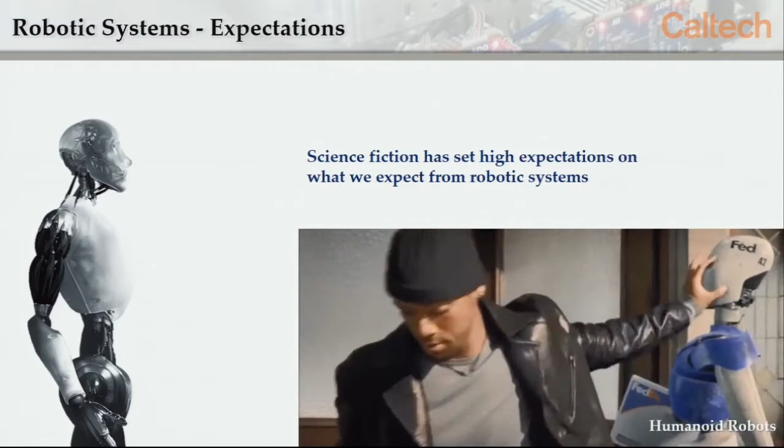As many of you probably did, I grew up on science fiction, still read it to this day, I hope you never lose that marvel. Science fiction has obviously promised us a lot with robotic systems and what they could do, from humanoid robots that deliver mail, walk the dogs, and even at the end of this, hug kids, so there's the human-robot interaction part, all the way to autonomous cars, robots that explore space.

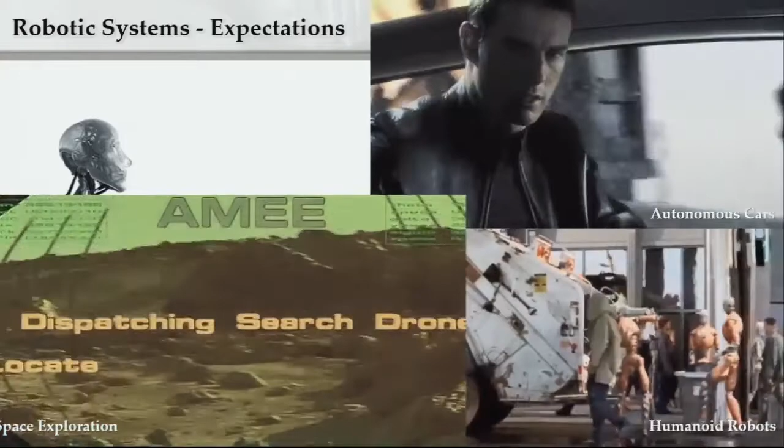This is off some pretty hokey 2000 movie with Val Kilmer, where this robot actually tries to kill people. But what's interesting is this robot has a helicopter that takes off and explores. And if you know, the Mars 2020 mission will have a helicopter on the rover that will take off and explore. So sometimes fact mirrors fiction in interesting ways. And of course, robotic-assisted devices and exoskeletons, right? So all these have kind of driven our imagination of what robots are and should be.

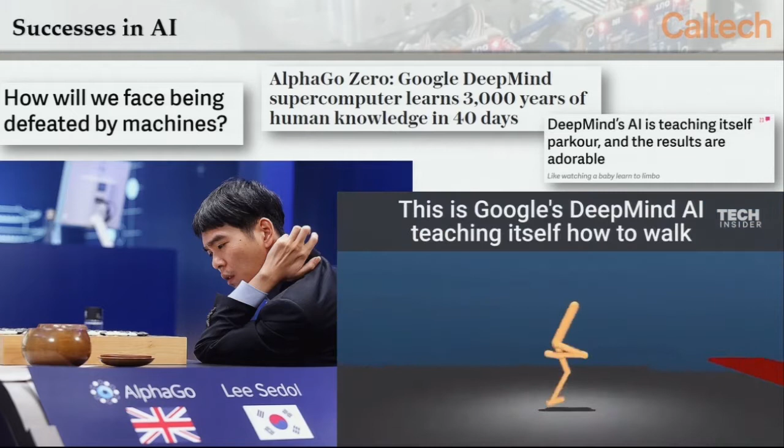And in that context, where are we today with this kind of image of where robots should be? The answer to this is a little funny. I had lunch with a bunch of grad students, and they convinced me to change the first slides in my talk last minute, so in between meetings with students, I put these in. The idea is, here's where we are from an AI perspective.

And I think Berkeley's a fitting place to do this.

There's been incredible successes recently, and you see the headlines, right? Like, supercomputer learns 3,000 years of knowledge in 40 minutes, or 40 days, and AlphaGo beats the Go champion, really impressive. And of course, this video a little while back went super viral because it learned how to walk all on its own, right? End-to-end learning. So this is sort of what everyone is talking about right now.

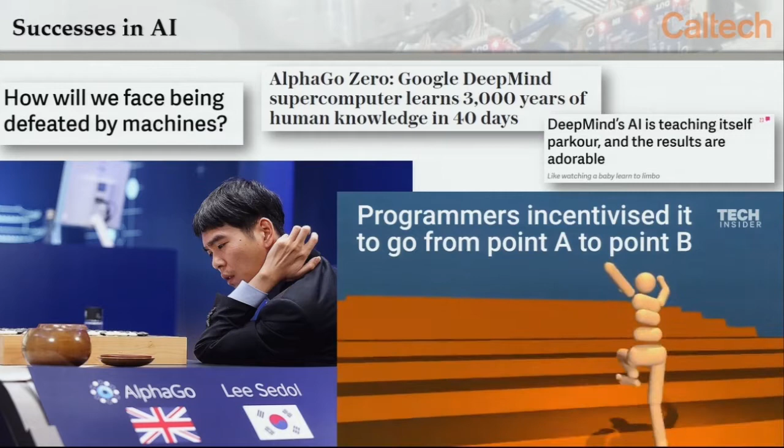And in fact, this spurs a lot of public perception, right? Like, how many doomsday articles do you read? Every time I post a YouTube video, you know, Skynet is here. And it's really funny to see that the public really doesn't know what's going on right now.

And in fact, if you read these headlines, things like this, they warn about artificial intelligence. And the subheadline is that Google-owned Boston Dynamics releases this video that does something, right? So there's AI and Boston Dynamics, right? And I think some people know where this is going.

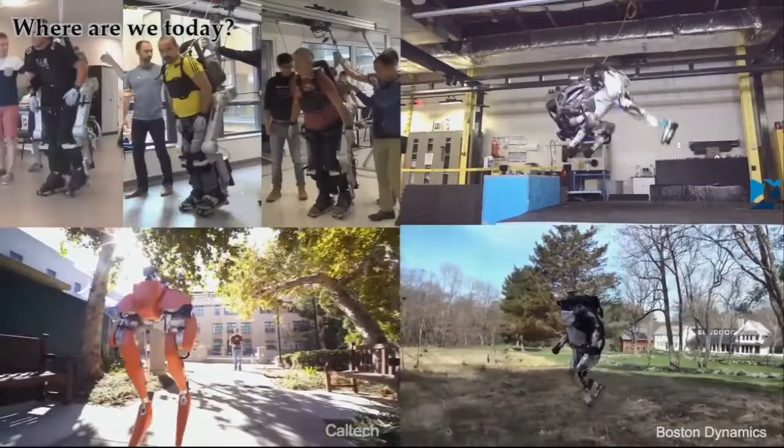So AI has proved very successful in the purely digital world. But let's look at the successes on robotic systems. We have Boston Dynamics that everyone knows doing backflips and running, and this is really impressive from a robotics and control point of view. To be a little bit self-serving, I have robots walking around Caltech, and I have exoskeletons walking paraplegics around. So we've done a lot on the robotic systems side.

So the question always comes, how much of this uses AI? By most definitions, the answer is zero. But it depends on your definition, and we could quibble about this.

But in the standard notion of a deep neural network or some sort of machine learning of this popular form, these all use robotics and control as their core thing. Now, I'm not advocating that's the only solution, but I think it's important to recognize this. And why is this the case?

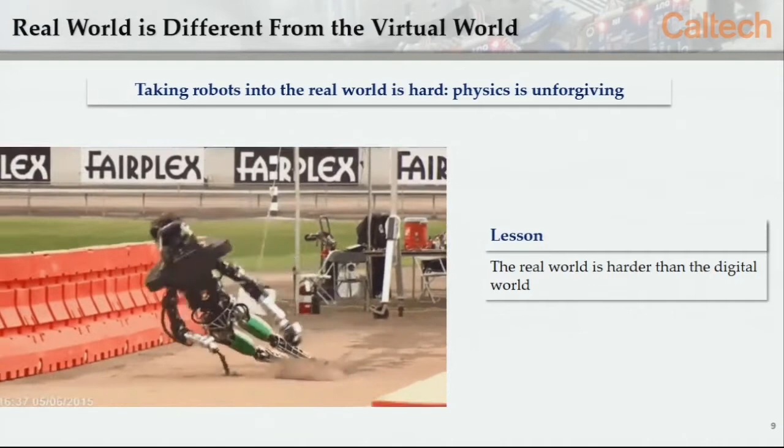Because the reality is that nature is brutal. Mother Nature doesn't care if you don't know what you're doing. She'll smack you down and make your robots fall. This happens to Boston Dynamics all the time. You've seen all the fall videos. I like this one especially, because it's just like a compendium of failures. And then it goes again.

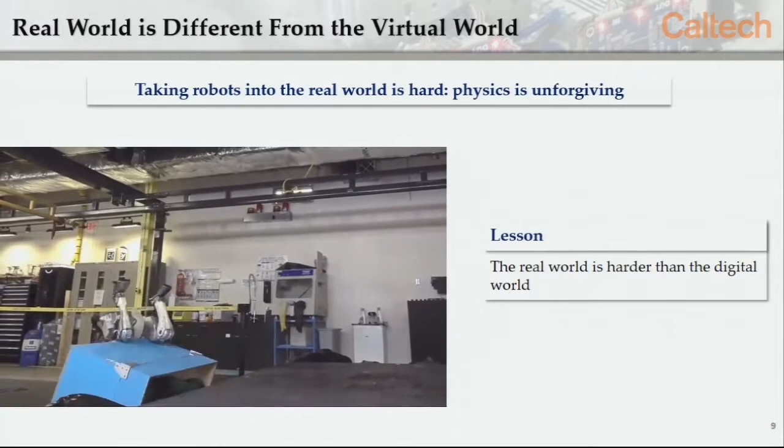Of course, it happens with the backflip too. And I give Boston Dynamics a lot of credit for showing their outtakes, because what you probably all know is for every beautiful video that you see, even in this talk, there were 10,000 videos that failed before and 10,000 that failed after. And you get to see the one perfect moment in time when everything works out.

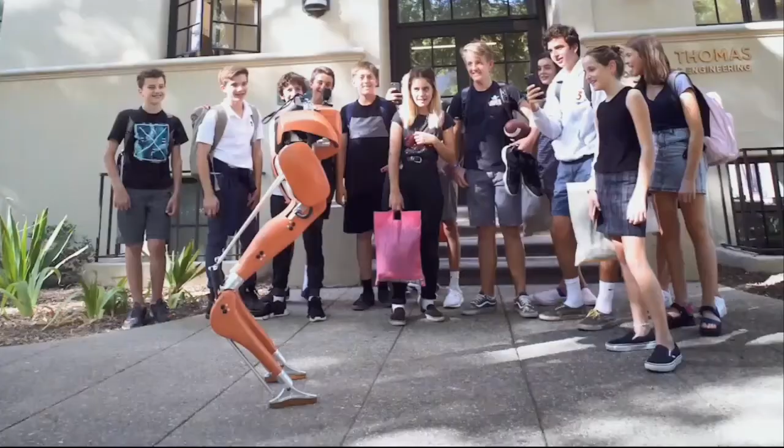And just to show that I'm not picking on everyone else besides me, this was Cassie walking in front of Caltech, and we saw these students, and we were doing a shoot, so this is a great shot. They pull out their phones. I feel totally comfortable, I'm back off scene here a little bit. And then I saw this oscillation, and then just faceplant.

And at that point, my only reaction as a seasoned roboticist was to kind of go like this, because that was going to help somehow, right? So we're all subject to nature smacking us down when we think we're doing what we need to do.

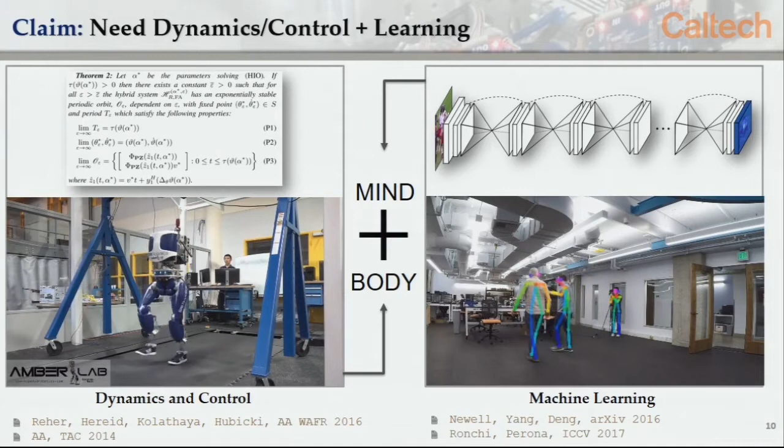So where does this lead to? And this is the message I want to make: here we live in our dynamics and control world, where I love living. We have theorems, we use models, we have proofs, everything's beautiful. Until sometimes you go to hardware and then it's really brutal and you realize you don't know anything.

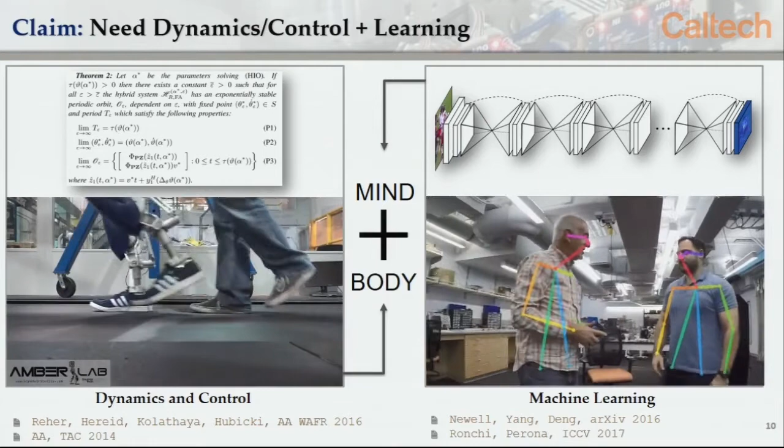On the other hand, you have what I call the mind, which is learning in a general context. What I would actually call this is data-driven methods—things that use data in the absence of models. And my argument is these need to come together. So what I'm saying is we need a peaceful get-together: when we know the models, let's use them; when we don't know models or we only have data, let's exploit that in the context of these models. That's my sort of pitch in terms of AI and robotics to kind of address the elephant in the room.

For most of this talk, I'm going to live squarely here. I'm not a learning person. So I want to talk a little bit about what this means, and then I'm going to connect it to the bigger picture at the end.

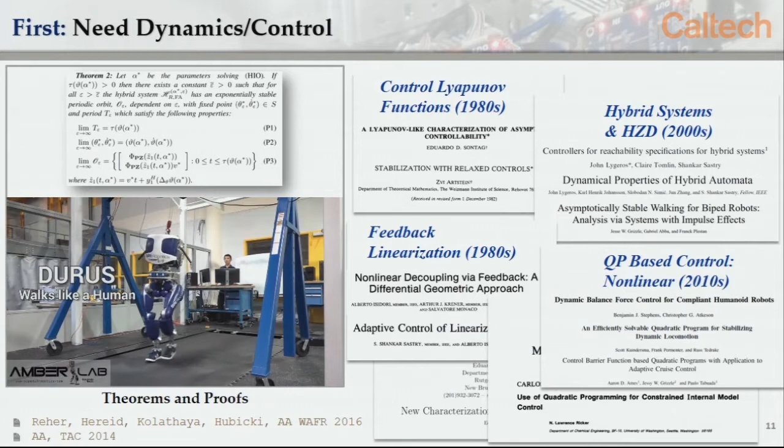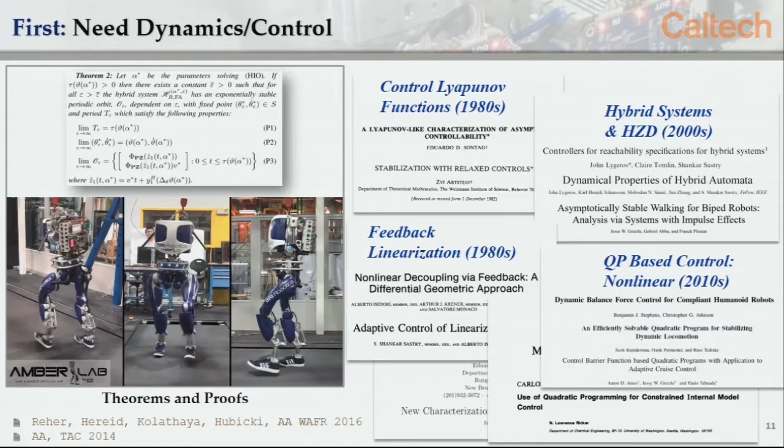So again, we have these beautiful theorems that build on all of this previous work that's happened in control over the years, and also robotics over the years, going back to the 80s, feedback linearization, control Lyapunov functions. Of course, one problem that control theorists have—I'll make fun of them a little bit, this is being recorded so I need to be careful—is they develop this wonderful math and theory with no notion of whether it will work on hardware. It's all about the beauty and understanding you gain, which is very useful. But if it doesn't work on hardware, how accurate is your theorem really? So the question is, how do we pull these things together in dynamics and control?

So I'm going to begin with giving everyone approximately a 15-minute tutorial on nonlinear control. Who's had a nonlinear control class? Okay, a good third of the audience. So you guys will find this very basic. For you people that have not, this might be a little enlightening.

So the challenge was the following: to develop a robot that's an order of magnitude more efficient in walking than Boston Dynamics. Yes, you guys will see this if you haven't yet. And so the challenge was to get more efficient walking than Boston Dynamics. The only way to do this was to exploit all of its inherent dynamics all the way down the chain. So how does this work?

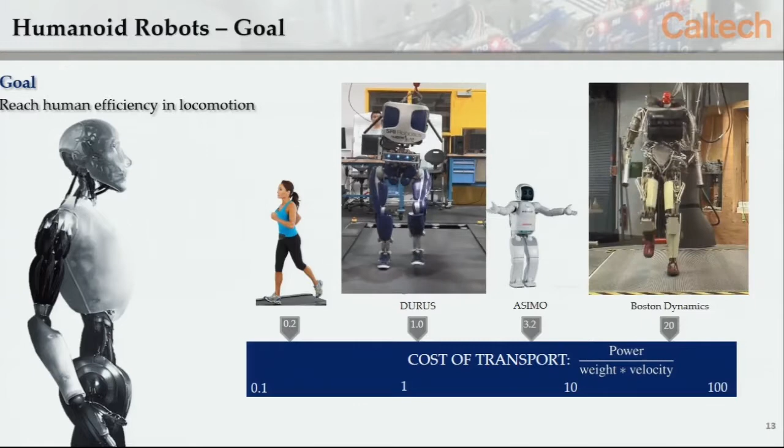So what is nonlinear control of walking robots in a nutshell? The ideas are actually really simple, so I can give them to you in a not too complicated way. What you do is you start with a desired behavior on your system. You have an actual behavior, meaning these functions calculated on your robot. You try to drive them to be the same. When you drive them to be the same, the end result is a simple reduced order model that captures the essential behavior of your system.

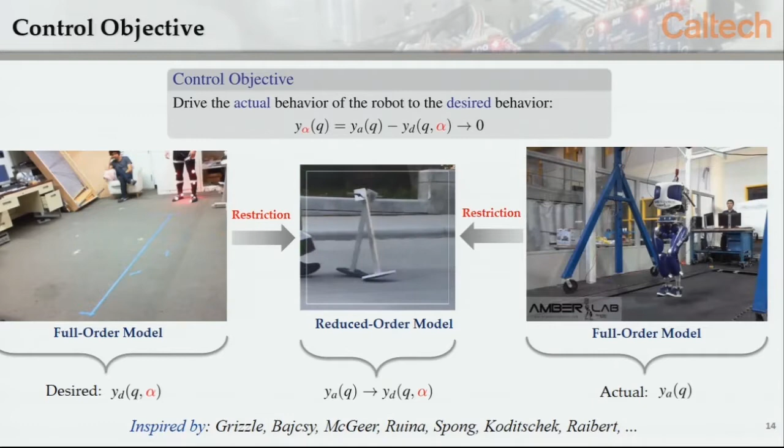By the way, a shout out to Ruzena—these were the first experiments I ever performed right here, 2011 at Berkeley, with Ram sitting back there looking very bored. So we're all, exactly.

So what does this mean? Well, more mathematically, we want to drive the signal to zero, and by doing so we project onto this surface—this is what's called the zero dynamics if you've had nonlinear control. So the question then becomes, if this is our objective, drive some output to zero, that's sort of the canonical objective in nonlinear control, how do we do that?

Well, the first step you'll often take is to say, look, if I take this output and differentiate it twice in this case, you're going to get a bunch of nonlinear dynamic stuff, Lie derivatives, and your input will appear here. And if you're lucky, what's going to happen? This matrix will be invertible. And you can say, I'm going to invert this matrix, cancel out these dynamics with my input, and the end result will be a double integrator.

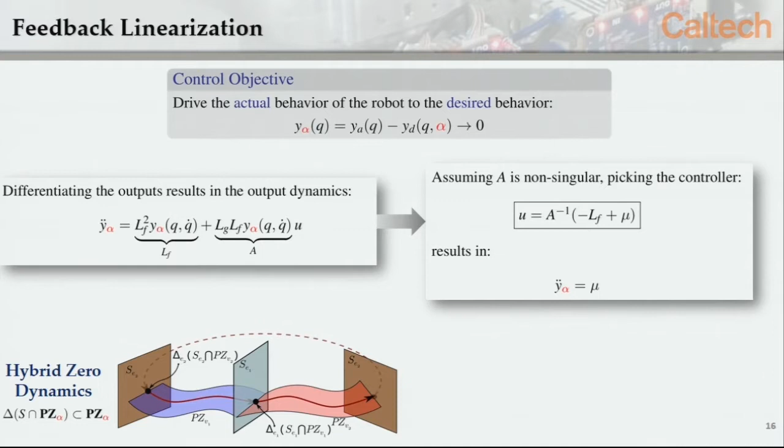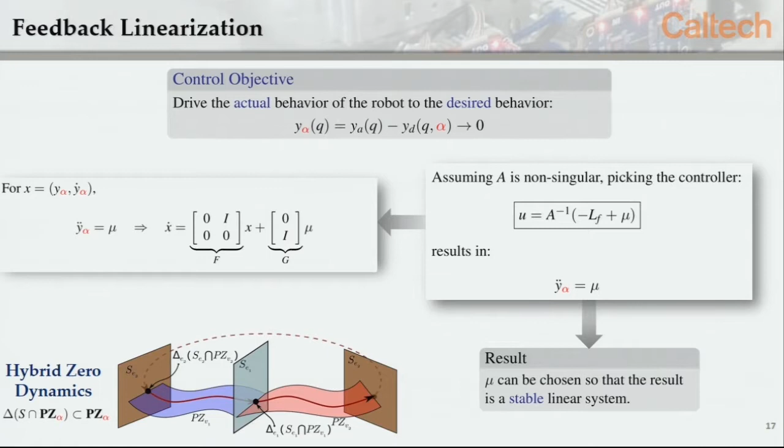Once you have a double integrator, we know how to stabilize this system. It's pretty simple—you can define a whole wealth of feedback control laws that stabilize that linear system. So this is kind of the graphic of the stability down to this surface. In fact, one way to do it is to write that system as a linear control system, so you have a nice F matrix, a G matrix. They're controllable. You can do LQR control. You can do anything you want to do.

And once you pick this mu, that gives you a feedback on these X dynamics. Those X dynamics include your output and their derivative. So by driving these X dynamics to zero, you're driving Y to zero and its derivative. And what you're left over with is what's called the zero dynamics—that's the passive dynamics of the system that you can't directly control. So we've defined this paradigm.

Alberto, hi. And from this paradigm, we can actually prove properties of the system. We have a theorem that says as long as this is stable, since we can stabilize this, the combination of the two will be stable. That's not particularly surprising, right? Everyone with me? Okay.

That is really the first term of nonlinear control in a very concise box. What do you mean by that, the zero dynamics? I mean that these are your outputs, chosen so they're associated with actuators in your system, which means this part of the system is controllable. You use that actuation to stabilize it. What's left over are the coordinates that are normal to your actuated degrees of freedom, which is why it's called normal form. These are the passive parts, meaning the part you can't directly control with an actuator on your system. That's what I mean by passive, okay?

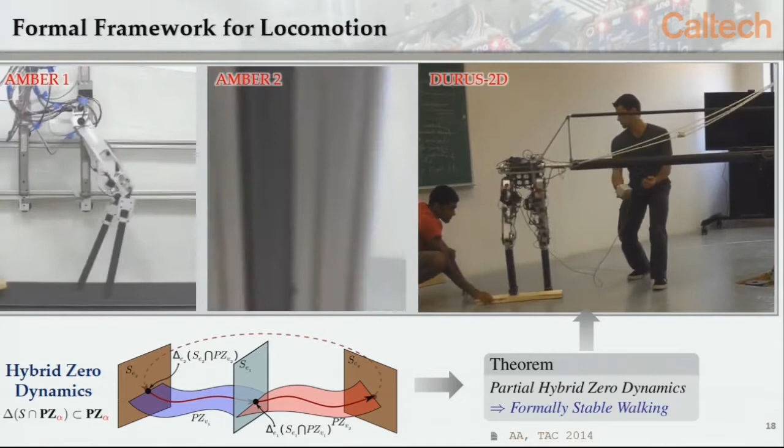All right, so that's how we get to stability. And in fact, this theorem and its offshoots have been implemented on a whole bunch of robots. So this is actually the first robot I ever built. I keep it here for sentimental reasons. Amber 1, Amber 2 — this is a prototype to a humanoid robot as well.

So I wanted to give this primer because what is it that we did here? This is nonlinear control in a nutshell in some context. We started with a nonlinear system, we feedback linearized it, and then we stabilized the system. Great story, right?

What's wrong with this picture? I wanted to give everyone that quick overview because there's something inherently wrong with what I just did. Something even kind of offensive about it. What is it? Let's forgive that, let's assume you have a perfect model. Yeah, if you have modeling errors, it's a nightmare. Something deeper than that, though.

You can't — that's correct, but I'm looking for something a little bit deeper. Sometimes even in principle, you can't cancel out the nonlinearity. You might not be able to invert that. That's still not what I'm quite looking for. The control can be unbounded. These are all true statements, but none of them I'm looking for.

We're taking a system that's nonlinear and beautiful, that has its own inherent dynamics, and our answer to that system is to cancel out everything that's nonlinear about it. Make it look like a linear system because that's what we understand. So we're fundamentally destroying the inherent properties of the system, right? See what I'm saying? We're making it look like something we know, even though that thing we know might not be the best thing.

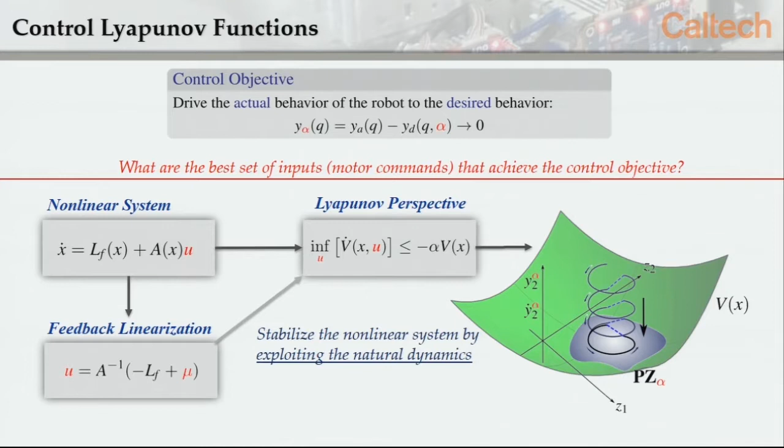Everyone believe me? Okay, so let's go through the math really quick. Just to recap, we have our system in normal form. This part is controllable, and this part is passive — so we have our x dynamics and our z dynamics.

A Lyapunov function is a positive definite function, so think about it for our intents and purposes as a bowl. Lyapunov theory is very simple: we have a bowl, and our objective, y equals 0, is at the bottom of our bowl. As long as our derivative decreases properly, subject to this bound, that guarantees our Lyapunov function will decrease exponentially. But it's a positive definite function, so if this decreases exponentially, so does our state, which is our error dynamics. So that means we'll have exponential decay of our error dynamics, all through a single inequality, a one-dimensional inequality.

Right? So the way I think about this is these fair games, where you put the coin in the thing and it spins down. Who's played these? I took this video myself at the Minnesota State Fair, and I was super excited. I took a picture of this with my wife because I was super excited — I'm like, this is Lyapunov functions incarnate, this is beautiful, and everyone thought I was super weird.

I was the only person, like, over 12, putting coins down this thing.

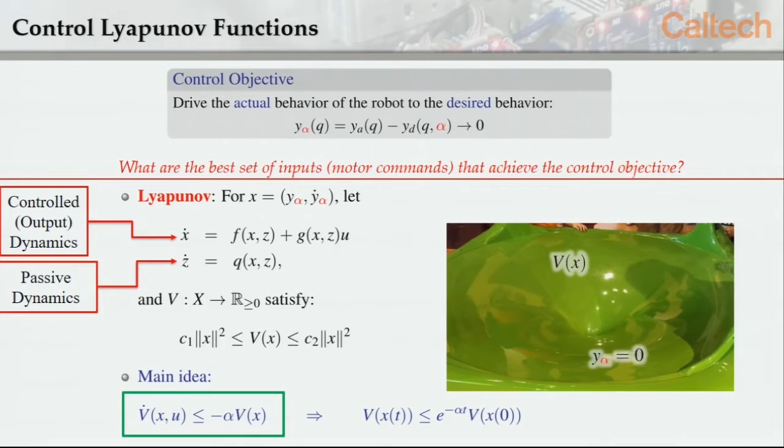But that's what Lyapunov looks like. But there's something else that goes even deeper here. We can actually characterize all of the controllers that are stabilizing now. Before, we picked one in some sense—the one that canceled out all the dynamics. Now we can say, if we can find an input that makes sure our Lyapunov function decays at the proper rate, then we have a whole set of controllers for which any controller satisfying this inequality will give the proper convergence. So we have a set of controllers that stabilize the system.

You can even do a hybrid systems version of this, where you add an epsilon that's exponentially stabilizing at a rapid pace. Then you can actually make guarantees that we can stabilize these hybrid system models of walking robots. I'm not going to talk about that in this talk, but these exist.

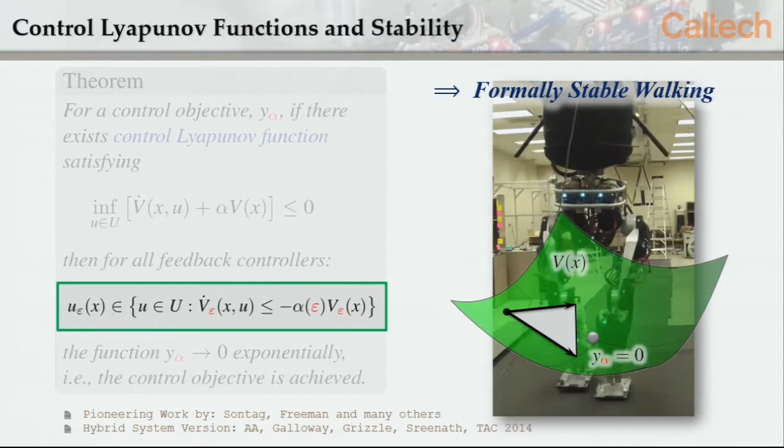Okay, so this is our controller now. The question becomes, how do we implement this controller? And how do we synthesize it? The knock on Lyapunov is typically, well, we can't actually find them, so it doesn't matter that there's a theorem saying they should exist, right? Who's heard that before? Huh? Okay. Well, he's incorrect in this case. Exactly—I wish he was here.

It turns out there's a methodical way of constructing these, and I like showing this. So let's go back again—just bear with me for a second. We canceled out our nonlinear dynamics to get a linear system. You say, why am I back here? Just bear with me. This linear system has a Lyapunov function, because it's stable, or controllable, whichever way you want to view it.

So what that means is, for the linear system, this becomes our inequality constraint in terms of our auxiliary control input—our mu, not our u, which was our real control input. All we have to do is find a mu that satisfies this, plug it in, and we get a U. Of course this still defeats the purpose because we're still running it through our feedback linearization, right? But we could pick the best mu—the one that minimizes the norm, the minimum norm mu that satisfies this inequality—like taking a favored direction that minimizes my input. But we're still not there, because this mu is for our linear system and has no bearing on the nonlinear dynamics of the system.

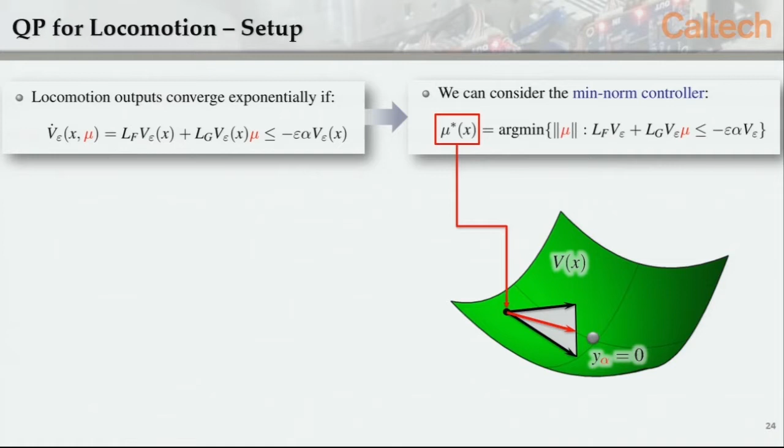But this suggests something interesting. This is actually a quadratic program, because we're trying to find the minimum U subject to a single inequality constraint that's affine in our input. And this is a valid feedback controller. In fact, it has an explicit closed form solution using the KKT conditions—it's called the min-norm controller. But by putting this as a quadratic program, all of a sudden a little magic happens. Who can guess this magic?

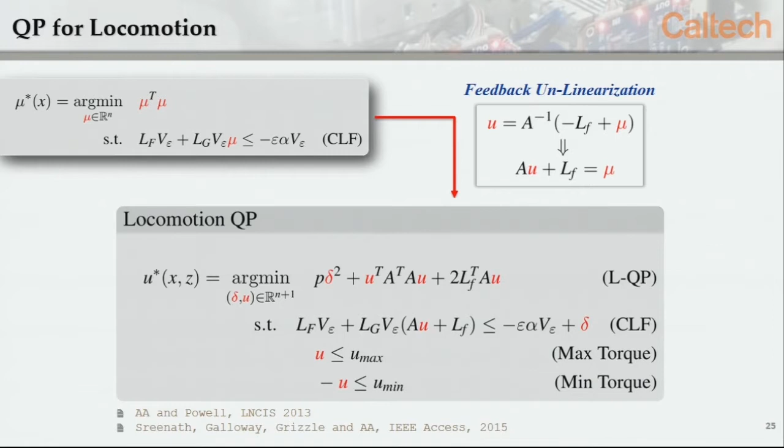You can do that—that's not what I'm looking for. You can untangle the mistake we made. We can correct our error, and our error was to feedback linearize the dynamics. We can unlinearize it. Note that we have an affine relationship between U and mu, so we can plug that into this inequality. Now we have a single inequality constraint for which our nonlinear dynamics are introduced back into the system. In fact, this is a proof that this is a valid control Lyapunov function for the nonlinear system, not the linear system. This encodes the derivative condition for Lyapunov function decay, and it encodes the natural dynamics of the nonlinear system. So at every point in time, you'll pick an input that's consistent with the inherent dynamics of the system rather than forcing the system to do something you don't want it to do.

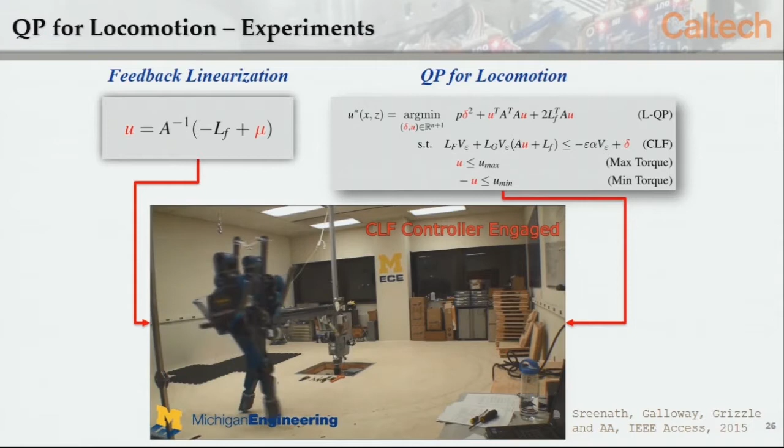Everyone with me? Okay, so this actually works on hardware too. These are results with Koushil, and I like keeping this video—it's from 2015, an oldie but goodie. Three years ago, I know it's a long time in the robotics world, but we were able to implement both feedback linearization and the CLF, and you find that with feedback linearization you get these high oscillation torques, because you're forcing the system to do something it doesn't want to do, while with the CLF you get a much smoother torque response.

So we've also done this in the context of humanoid robots, meaning we can extend this to very complicated systems.

The inverse here of the decoupling matrix? Yeah, that matters too, actually. In fact, you can at least relax the conditions that the decoupling matrix be invertible now, right? And in some sense, you're calculating a pseudo-inverse, which can be calculated by a quadratic program. So yeah, it actually does matter. It's a good observation. There's a lot of little things here.

We had torque bounds too. There's a lot of little details under the hood that's actually really nice when you get exposed. You can, for example, do multi-objective control—take multiple CLFs and balance multiple objectives at the same time.

So it opens up quite a few things. Again, now I'm going to go back to the robotics world. I've given everyone their dose of nonlinear control for the moment. And we applied this to Durus.

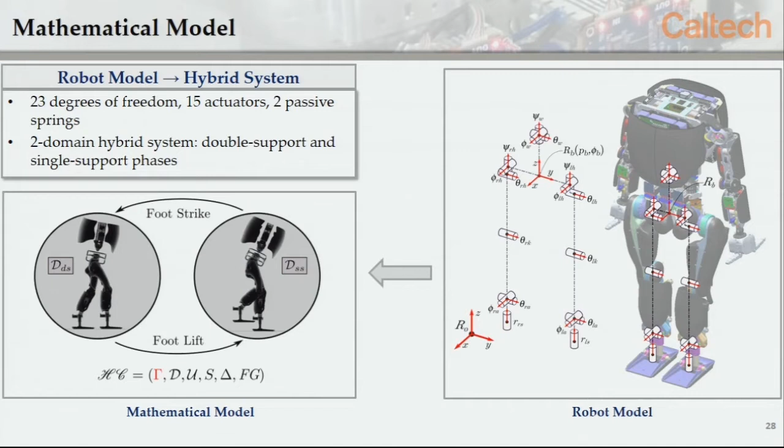Durus in this case has this multi-domain hybrid system model. Remember that these outputs, we wanted to drive them to zero, for which we had a theorem that says everything is good in that case. And we did that by a Lyapunov function. It turns out from these outputs, we got the Lyapunov function. So generating the outputs is where all the computation will happen. Once you have the outputs, you get the Lyapunov function.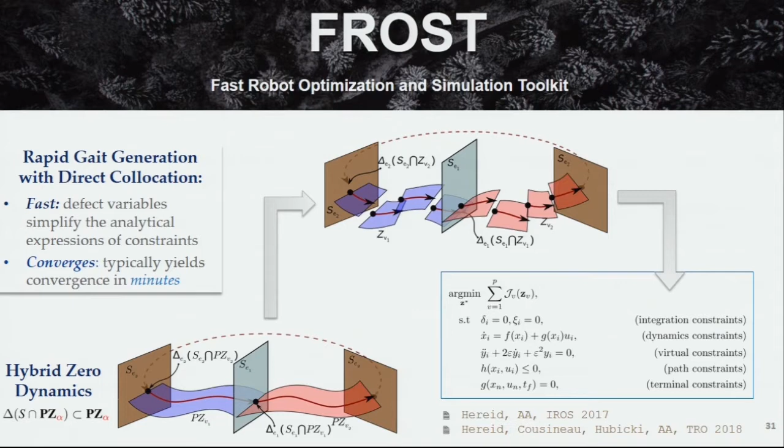Now, these outputs need to be calculated in such a way, meaning these parameters need to be chosen, so they respect the conditions of the theorem. It turns out that you can, and I'll be brief here, but one of my students, who's now a professor at Ohio State, developed a toolbox using collocation methods together with this, making it computationally feasible to calculate these really complex conditions for humanoid robots. The idea is you sort of dice up your space and your conditions, you solve this much bigger problem, and that makes it much more efficient.

Just to show you a couple examples, he implemented this on a walking robot. In this case, the treadmill is changing speed, and what you're seeing is the trajectory generation running. What you're actually generating is the Lyapunov function in about half a second increments. So that's the computation gap. In about half a second, we can measure the speed and generate a gait for that walking speed.

With that comes for free a Lyapunov function, a control Lyapunov function, that we then put on the robot to walk at that desired speed. So we're at onboard, not real time, but onboard gait generation using these methods.

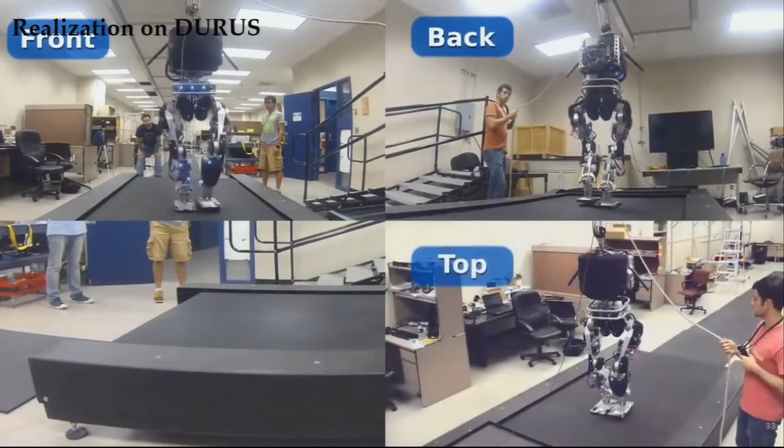The same things applied to Durus, this humanoid robot I showed you earlier. In this case, it takes about 5 to 10 minutes to generate a walking gait using all these conditions that I told you about. And the end result is pretty smooth, natural walking. It's important to note that in this case, Durus has springs at the ankles.

So you have passive dynamics. The zero dynamics represent this movement of the entire base of the robot, which is a very non-trivial condition to have because it oscillates up and down, right? And that's when the battery's turned off.

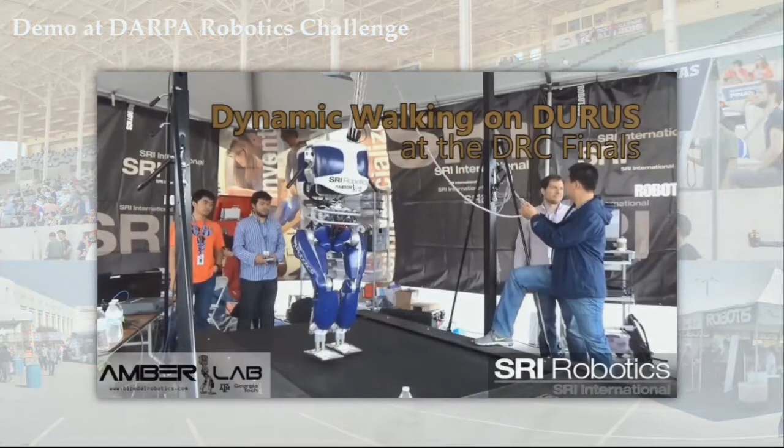So we actually took this to California a couple years ago for the DARPA Robotics Challenge and implemented it in front of a bunch of people. We had like 2,000 spectators come by and watch this robot.

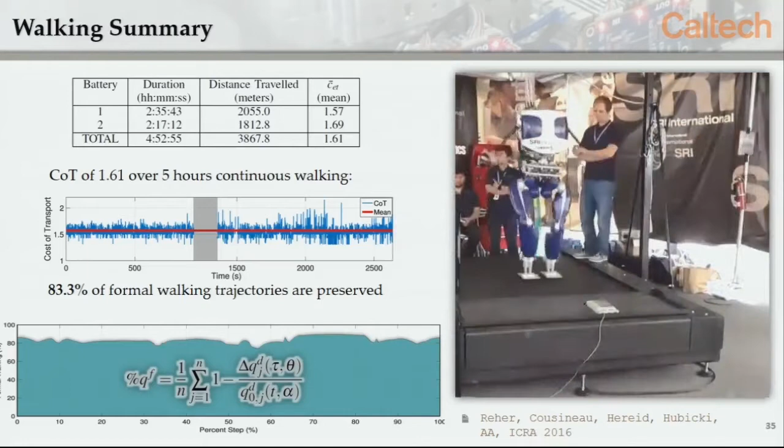And the reason why I bring this up, and I'm being a little fast, but I wanted to just show this slide. So I went through the development of all this math. I slowed down a little bit on the development of the control Lyapunov function because I think that's the important part. Then I sped through slides where it actually works on hardware, and this worked on hardware really well.

In fact, this is the most efficient walking at the time ever realized on a humanoid robot, with a cost of transport of 1.6. And we had sustained walking for over 2.5 hours continuously on this robot.

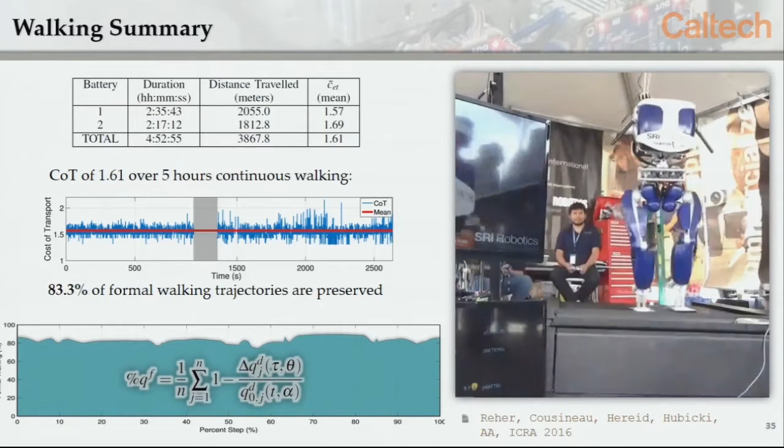Meaning this wasn't a one-shot video, but this thing would run and run and run. That was great. But to do that, I want to be fully honest. And the honesty is that the perfect clean mathematics accounts for about 83% of the trajectories. So even though I had this wonderful theorem and we have this computation engine, there's still about a 20% gap between

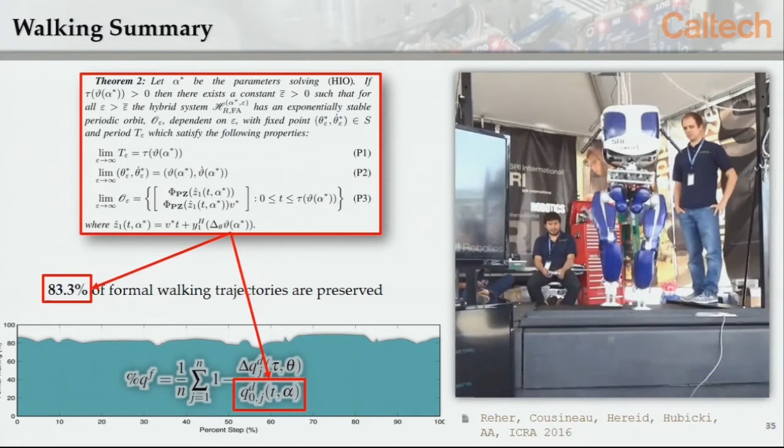what the math told us and what actually worked on hardware in the end. We had to tune all this stuff in to handle uncertainties of signals, etc. So again, the lesson here is there is a reality gap on robotic systems. And no matter how beautiful the theorems are, we need to address this reality gap.

So on this robot, every joint was active above the ankle here. So the only passive dynamics were at this spring right here, which is actually really beneficial. It means that we had a two-dimensional zero dynamics that was actually normal to the forward stability direction. So you could essentially show that this is stable for arbitrary incarnations of your outputs, subject to the constraints that they're hybrid invariant.

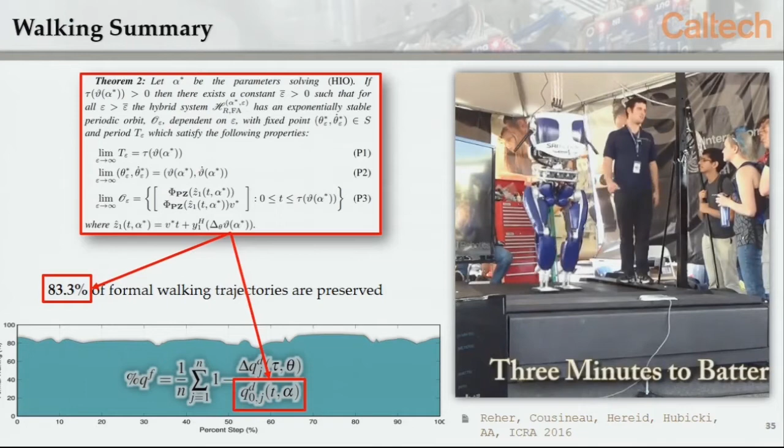That was a dump of some of the math under the surface, but it actually was a really nice design. And this, by the way, we designed with Jonathan Hurst and SRI exactly so it would have this nice stability properties with respect to the mathematics. Okay, so there's still some stuff to address.

Okay, so what I did, that's a good question. The desired trajectories are the ones given by the theorem. What I did is I looked at the desired trajectories here. The deltas are how much we had to perturb those trajectories to stabilize the system.

So what we did is, on top of our nominal controller, we added these sort of robustifying regulators. For example, if the torso was leaning, the leg would kick out a little bit. We had no justification for doing that except it made the walking better.

So we looked at the magnitude of those perturbations and calculated how much it was modifying the nominal trajectory, and that was our metric for how much we were perturbing. It's not a great metric, but at least it shows something. The shaded region is our nominal perfect theorem trajectory, and this is all those regulator adjustments we were doing on all the different joints.

So we had to make these modifications to get it to walk for 2 hours continuously in a demo. In the lab, we actually implemented it cleanly, the earlier video, and that only took us 3 weeks from the time the robot arrived in our lab to getting the first dynamic walking on a humanoid. And so it's because of the math. I think math saves you ultimately a lot of time when it's done right.

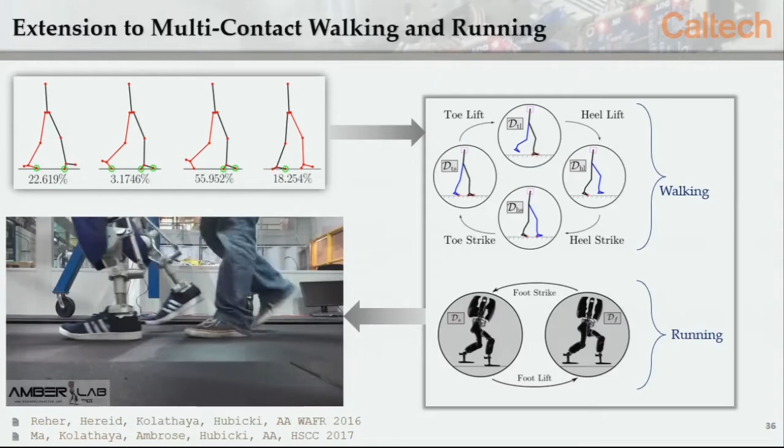Anyways, I just wanted to note that after the challenge, we extended this in a couple of regards. We got a robot to run using the same general mathematics. This is a planar robot, which means it can fall forward and back, but stays upright. I just think it's a pretty motion, so I like to show this video.

Running's really hard, by the way. Making a robot run is really, really hard, because during the flight phase you have no control over the system, so you have to land perfectly every time.

And we also extended it to multi-contact walking on Durus. This is probably my favorite walking we've generated so far, because we get this nice heel strike and toe strike behavior - very natural human-like walking, which, by the way, increases the dimensions of your passive dynamics when you go up on a toe.

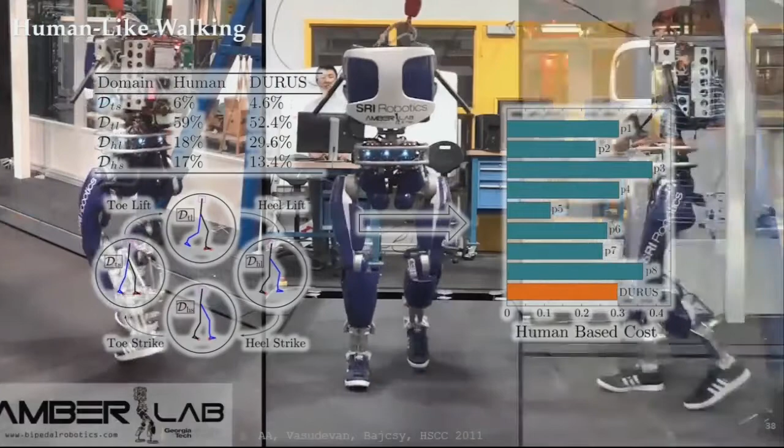And I think it's cool to show that the data - we actually compared this walking of Durus to the data we collected in Berkeley back in 2011, and found that relative to a metric on the graph, and I won't explain the details, Durus is actually human-like, meaning you can't distinguish it from human walking in some metrics. So that brings us back to those experiments.

All right, so I wanted to do all this control generation because now I want to get to safety. And there's no way to talk about safety without understanding stability first - they're duals of each other, right?

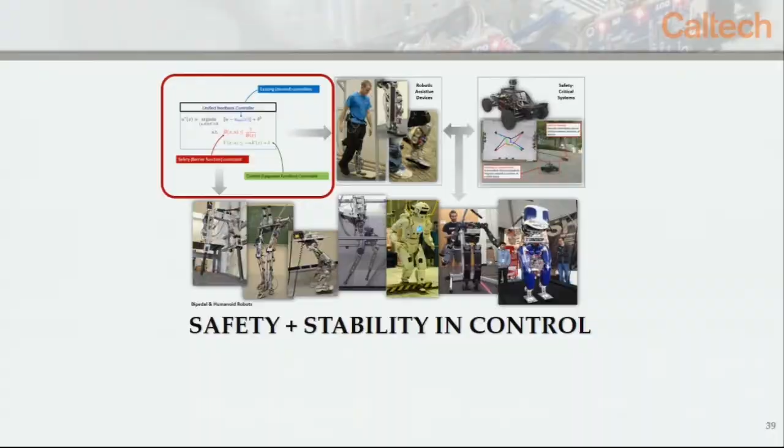So safety is obviously becoming an incredibly prevalent and immediate concern. A lot of people are working on it - Claire Tomlin has a bunch of people - and I think it's a fantastic problem as more of these autonomous cars crash, which you know they're going to do. We need to understand how to handle these scenarios.

And actually it was Koushil that did this great problem called the stepping stone problem, as a way of capturing what it means to have safety and what that means when you put it together with dynamics and stability. So in the context of the stepping stones, it's a very clear problem.

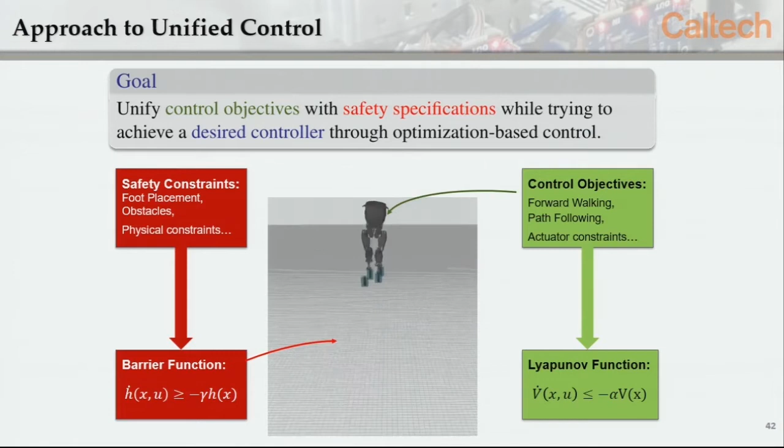So in the context of robots, what does this mean? At a basic level, if you want a robot to walk on stepping stones, you have to have control objectives, which I already showed can be encoded by Lyapunov functions, but you also have to have safety constraints. And how do you put these two together? That's phase 2 of this.

So the idea is actually very similar to Lyapunov, so I can be fairly brief with it. But it's slightly different, so don't confuse it with Lyapunov. All right, so the idea is safety in our context - and this is not the only definition of safety - is keeping a set invariant in your system.

So it's important to note that this is a bit different from Lyapunov. First, h is not necessarily a positive definite function - it just defines your safe region. And second, this inequality is conspicuously flipped.

And what that says is, as you approach the boundary, you have to go tangent to the boundary, but within the set, you don't make sub-level sets invariant, right? So you can let the system wander all the way to the boundary, and then you say you have to stop.

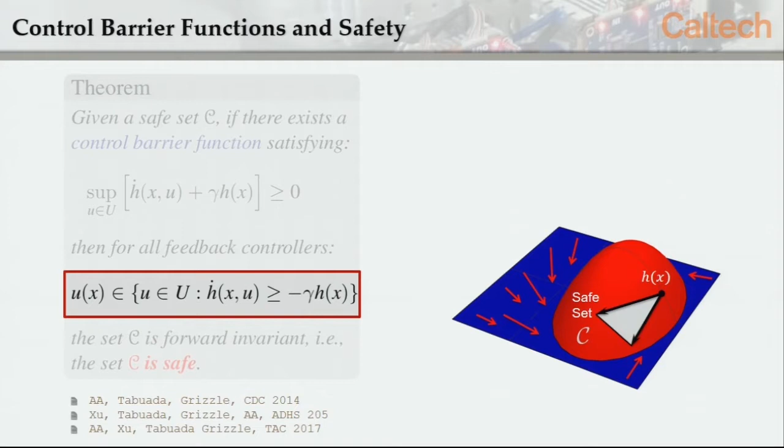So we have a whole collection of inputs. Just like we had with Lyapunov, we can write this as a quadratic program, only in this case it's slightly different. Now we're saying we want to satisfy this safety constraint subject to a quadratic cost. You might want to find the closest input to some other control input somebody else gave you, subject to being safe. This is a pretty basic framework for safety critical control, but it's pretty applicable. In fact, it's in some sense the best characterization you can have because it's actually necessary and sufficient.

You don't have to read all these theorems. The point is it's necessary and sufficient, and we can prove it as such.

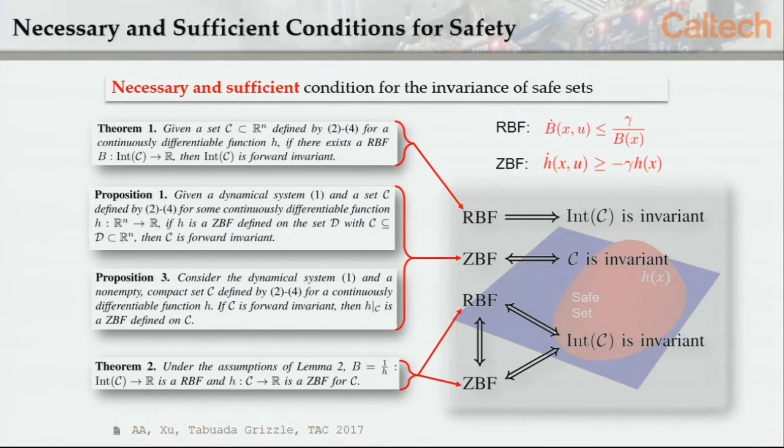Moreover, it takes you a little further than you might expect because we can bring together safety and stability at the same time, meaning we can balance these two objectives. So here's our safety controller. How do we bring in stability? You guys will nail this one, I'm confident. This is Berkeley. This just says our system is safe, meaning we stay within a set. How do we make sure we're stable at the same time?

Throw in a Lyapunov function. We already had an inequality constraint here, so let's just add these together. Now you're going to have to be a little careful because you're going to have to relax your Lyapunov function, because you might not have a solvable problem. If your equilibrium point was outside of your safe set, you're going to conflict. So you have to decide which of these two is more important to you, safety or stability. But it lets you do them both at the same time, so you can unify them together. You see why I went through the Lyapunov stuff now, making sense on the back end?

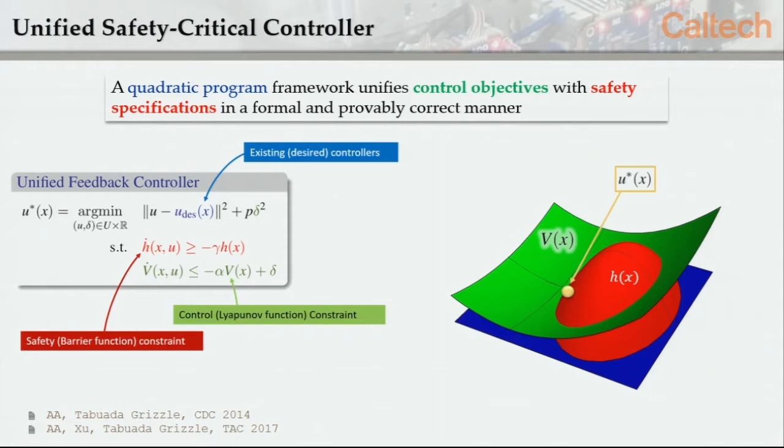And then we kick it. The story with this is that I got on a Segway for the first time and I just about killed myself. I got on and then I was like, alright, I want to slow down. I went to pull back like you're supposed to, but I leaned back and ended up creating a larger angular difference, so the Segway just shoots out. I was like, alright, I'm not getting on this thing again until you can prove to me mathematically it's safe.

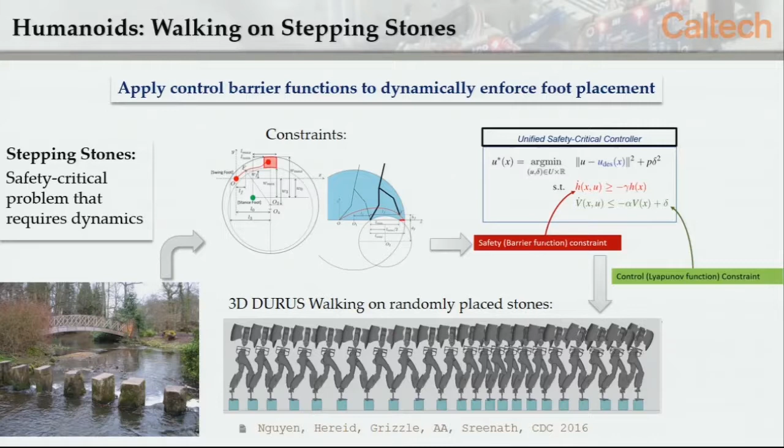So we've since carried these ideas to stepping stones. This is joint work with Kaushal. This is just another shot, but it's pretty cool. In this case, we do have a Lyapunov function, which is the walking I showed you demonstrated on DURUS, and then we add the barrier function. All of the movement modulation is solely a function of the barrier function modulating the foot placement of the robot, so it's not a planned motion, it's a reactive motion to the things moving around.

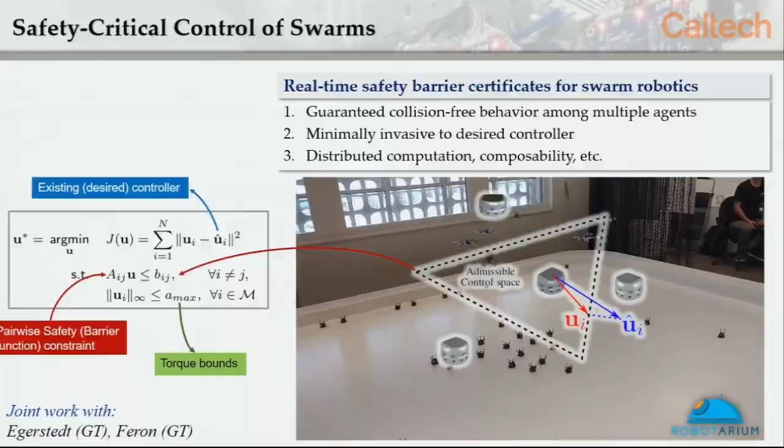I've also worked at Georgia Tech with Magnus Egerstedt on applying this to multi-robot systems and swarms. In this case, you can define safe regions around all the different agents and synthesize barrier functions that encode those safe regions. For example, this is 50 robots told to go directly across the room in a straight line. Naturally, a straight line with two robots is going to mean collision. So all of this movement you're seeing is a function of the barrier function reactively moving them around so they don't collide, giving you this weird swirling behavior. Ultimately, on the back end, when they're finally free, they can go to the position they wanted to go to initially. So this is putting those pieces together.

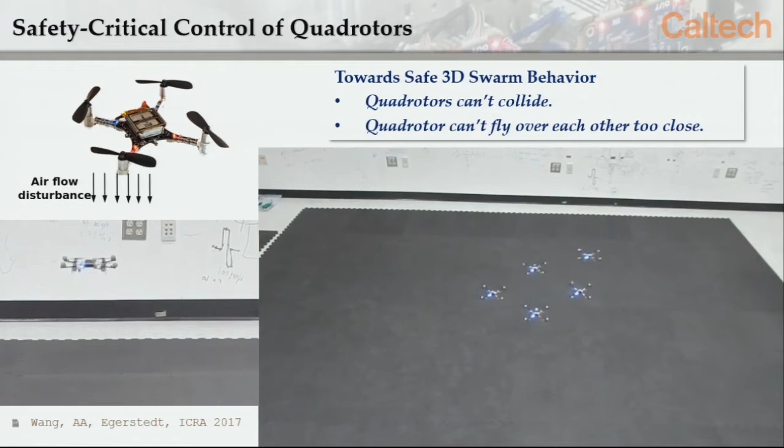We can also do it for more interesting systems, so drones in this case. A grad student is flying this one, and these are on autopilot, following a trajectory. The whole objective of the grad student is to crash the drones, so he's trying to ram his drone into those drones. The only thing preventing them from crashing is a barrier function that's like a force field, a very Star Wars kind of force field thing around the drones. It's actually cooler when they go faster.

By the way, we're using differential flatness and everything here, so we're actually exploiting the nonlinear dynamics of the system in the process. Kaushal has good work on this stuff for drones as well, for nonlinear systems. And finally, just to show you the real world will always smack you down, here are the outtakes.

So what was happening here? By the way, why did this fail? I just said I have a theorem that says everything's safe. Why did it fail? That's actually not—that could definitely be a cause, and in fact that could exacerbate what actually happened.

Boom. Motion capture can drop out sometimes. You lose a couple packets, it doesn't know where it's at. Imperfect sensing—no matter how good your math is, if you don't know where you're at, you're dead. So it's important to keep these things in mind.

Finally, we're actually working to extend these ideas to cooperative control of multiple heterogeneous robots. This is motivated by Mars 2020, so you have a rover and a helicopter. The idea here is we use barrier functions to get an abstraction for the system, if you know formal methods, and then we can plan over that abstraction in essence.

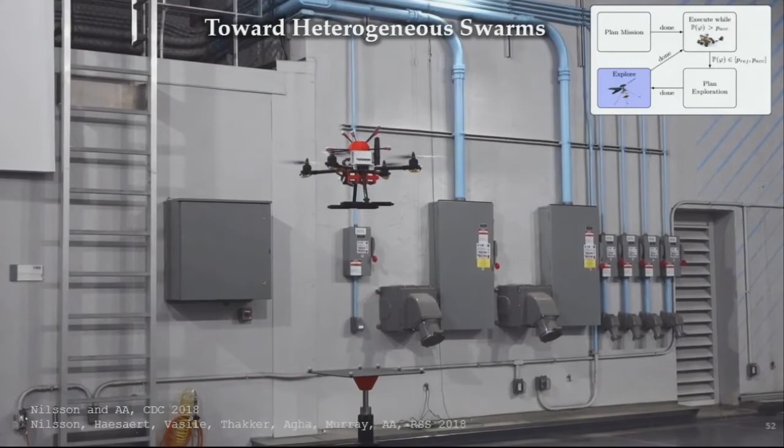So here the rover comes out, the drone takes off. This is all autonomous, by the way—there's no one controlling it. It goes out and explores the space, figures out where the sample is that you want to take, the scientific sample, comes back and lands, and then this thing drives off and finds where it wants to go. Again, it's a very slow experiment, but we're starting to try to push to do much more rich autonomous behaviors.

And that leads to the next steps. In the remaining few minutes, I kind of powered through the first part of the talk. I know that was a lot of information, but I want to get everyone to hear all these things. So the next step is, where do we go next? Autonomy is kind of the big keyword of the moment, but there's a reason it's a keyword, and it's really important.

It's about how do we get robots out of the lab now. Again, the couple failures I showed you all had one thing in common: we had bad sensor data, or we had bad models. And the thing is, when you take a robot and throw it in the real world, you're going to have lots of bad sensor data, lots of bad models, and terrible interactions. So how do we start to deal with that?

And this is where I'll come back to learning. So I said we need to bring the mind and body together. And again, this is a very high-level characterization.

Ben's complaining—this was my slide, inspired by John. This is, by the way, for those that don't know, a classic John Doyle talk. You'll see there's always the quadrant—it's coming, it's coming, it's coming. I got to represent Caltech a little bit. All right, forgive me, all right, last one.

So we, of course, have a bunch of successes in the purely digital world for learning. We have a bunch of successes in the purely mechanical world for control. And obviously there are systems that live at this intersection. So obviously, where we want to be is here.

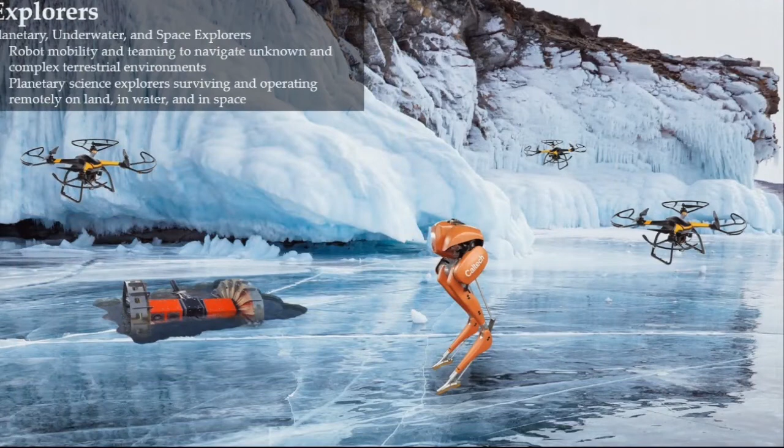Let me give you a very concrete example. We call it Explorers. The idea is I want to get my robots out of the lab into the real world doing complex things. Let's go one step more concrete, and I'm going to pose a challenge problem that I have no idea if we'll ever solve in my lifetime.

There's a trail that goes from Mexico to Canada called the Pacific Crest Trail. Imagine what it would take to have a robot traverse that trail autonomously. Just think for a second about all the problems we'd have to solve to make that happen. This is what we call a moonshot. It's a very hard problem.

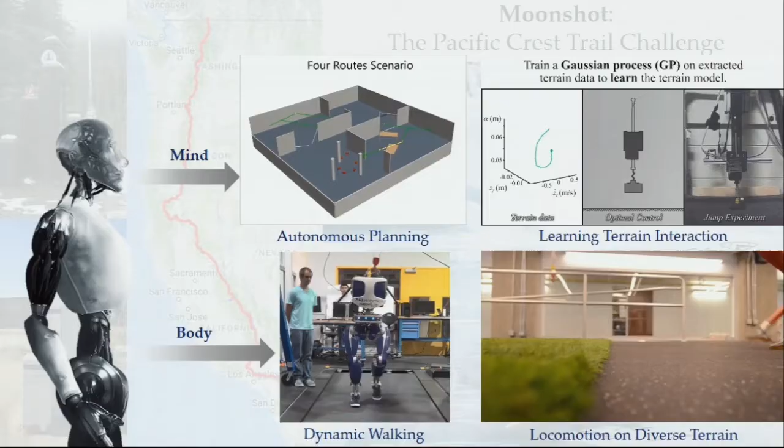For example, you'd have to scale a wall. That's not very hard. And then you'd have to keep going all the way up to Canada, right? Okay, no one laughed at my joke. I usually get a good one. Don't broadcast this on YouTube, please.

So the idea is, you'll have to do everything from planning, learning, dynamic walking, locomotion on diverse terrain. Let me zoom in one more bit. I started really high level, let's get a little more concrete. Let's just look at the walking for a second. So what are we going to have to do to realize this? If you look at your robot, the internal dynamics of the robot you essentially know perfectly, for all intents and purposes.

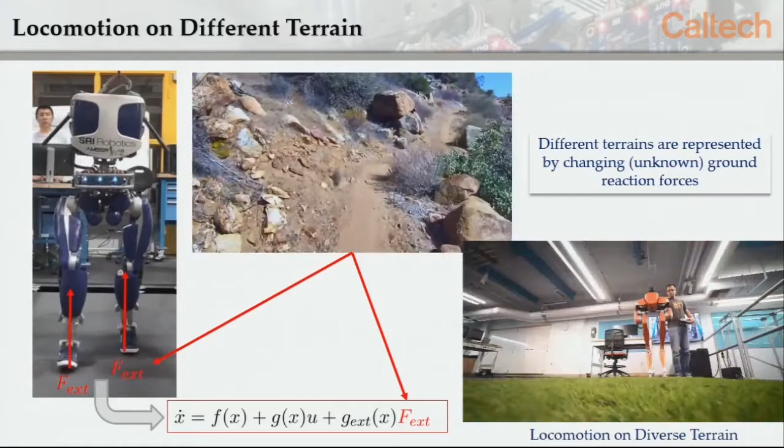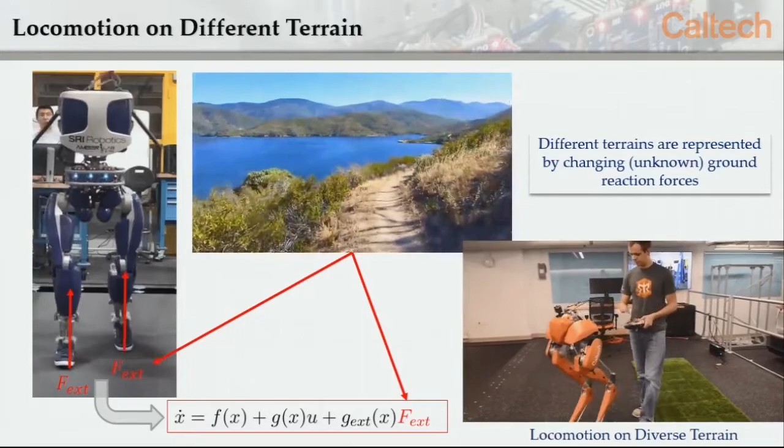What you don't know is this reaction force interfacing with the real world. So you can actually write your dynamics in a way that your unknown parts of the model, the interaction with the real world, are isolated as this additive term. Importantly, this term is the external forces at the contact points. Everything else is a Jacobian projection. So no matter how high dimensional your system is, your contact forces are the only thing you don't know, and that's what you need to learn to handle all these different terrain types.

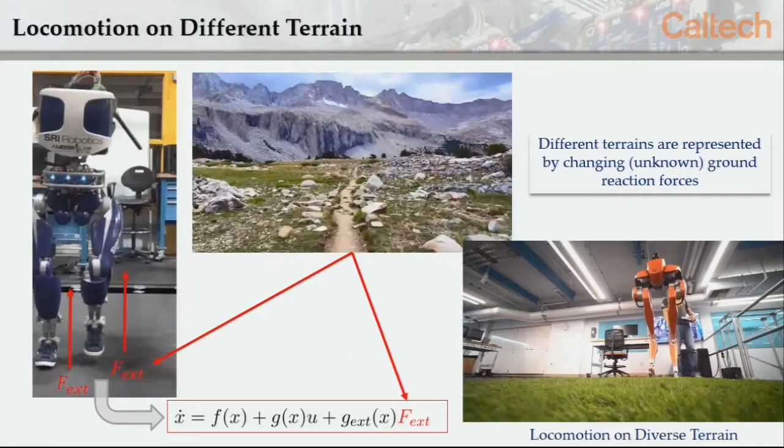It turns out that hard ground is easy to model in terms of contact, but granular media, meaning sand and dirt, is actually almost impossible to model. There are people that have whole labs devoted to this. So let me show you how that works.

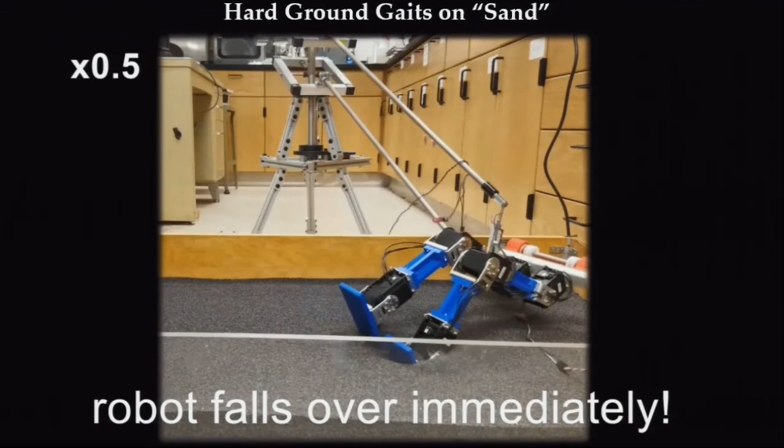If you take a walking robot and put it on hard ground, it walks fine. Put it on sand, and this is what it will do. The model's just totally wrong. It's the same model internally we had before, and that worked fine, but it fails. So the idea is you can start to use learning in a loop.

Learning here I'm using very generally. In this case, we're talking about Gaussian process regression. We start with an assumed model of the system, run this through experiments, look at that data. From the data, we iterate our model of the world, update that model in our control framework, apply it experimentally again, and repeat. In this case, we're able to actually get this thing to jump in sand and dirt.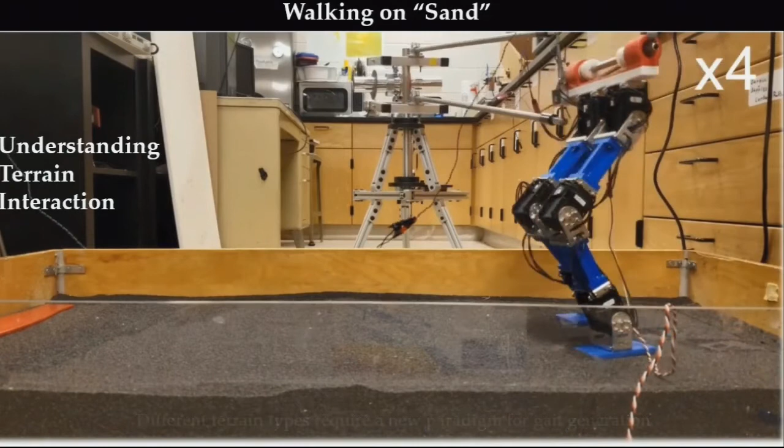This is joint work with Patricio Vela at Georgia Tech, getting the robot to a desired height. If you modify the reaction force models of walking robots, you can get them to walk on sand and dirt as well. This is the same robot, the same sand, but now that we've updated models of the world, we can walk on it. So that's how learning and control and dynamics can start to play a role and be paired.

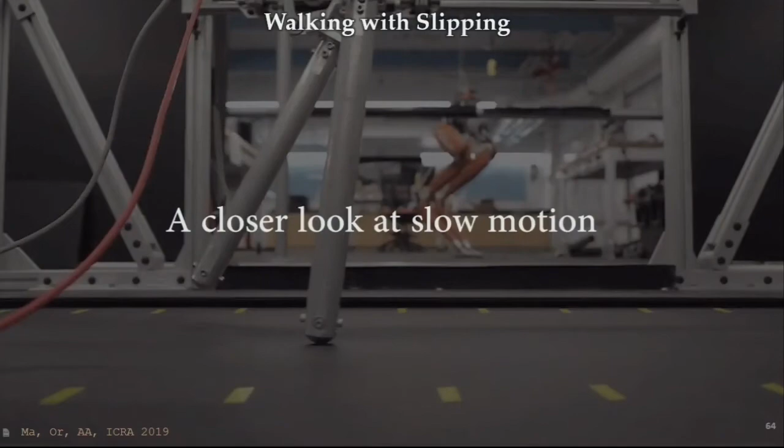Here learning, I mean a very specific form of learning. We're playing with this in different contexts. For example, we recently got Amber, our custom-built robot in our lab, to walk on an oil-slicked treadmill. So we douse this thing, and actually it's like sort of walking on ice. You see how it slides forward? We put that planning into the motion so that we can handle this different terrain type. It's kind of fun seeing it.

By the way, if you took a nominal controller and put it on the slick treadmill, it fell on its face every time. Walking on ice is not easy.

Finally, we're working to extend these ideas to Cassie. For the sake of disclosure, there's no learning on here whatsoever—this is all robustness of nonlinear controllers. But it's still cool to see where we're able to get in terms of getting this robot outside. So again, we do all the things I said: start with simulation versus reality, make sure there's alignment, test it in our lab, test it on flat ground, and then ultimately put it on non-trivial terrain, because the goal is to get this thing out into the real world.

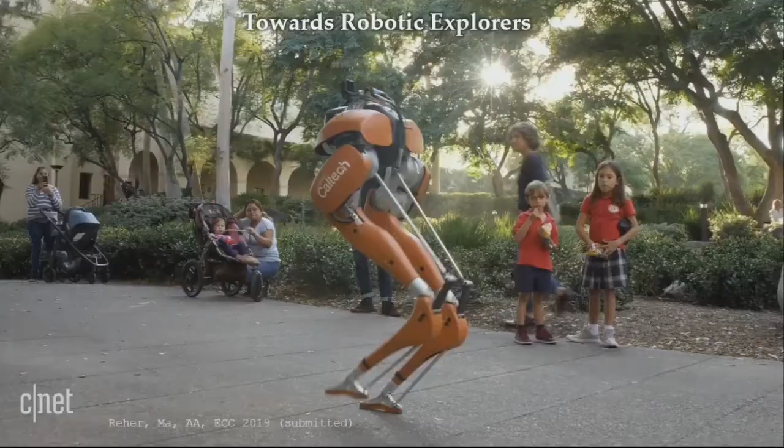So just to show you how far this can go, this is CNET. I grew up watching CNET reviews online, so I was kind of pumped about this. I figured, okay, this is a good time to take the robot out and totally have it spill all over the place. Let's see how far we can take it.

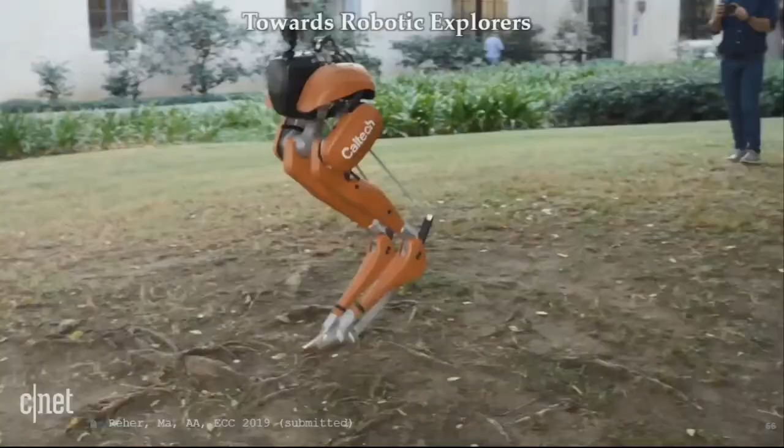So we took it on the hardest terrain we figured it could potentially handle, ending with a whole clump of tree roots, just to see how robust it was. It did okay until it fell. Here's one more shot—just look at these roots, though. This is hard. Think about doing this blindfolded with no models. It's dancing a little bit.

And ultimately, though—boom.

Ring bearer? No—this robot was the ring bearer at my wedding, by the way. It walked up the aisle with a ring on its back. So yes, I'm really that big of a nerd. I don't have a video of it, though, unfortunately. But this robot walked up the aisle.

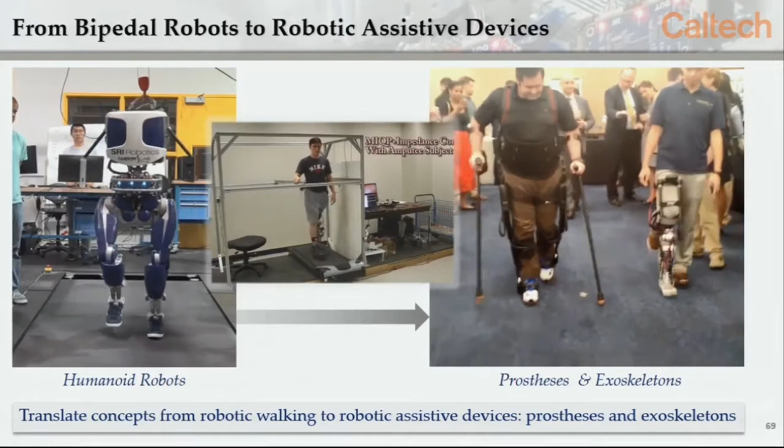So in my remaining few minutes, I'm bombarding you with videos, but I think it's cool. The last step is: what's the point of doing all this? I think a very natural way of applying these things is to have robots that help people. Once we have a humanoid robot walking, we can take it to prosthetics and exoskeletons. It seems like a very straightforward process, and in some ways it is—in some ways it's incredibly challenging. It opens an entire world of soft robotics and how you interface robots with humans, human-robot interaction.

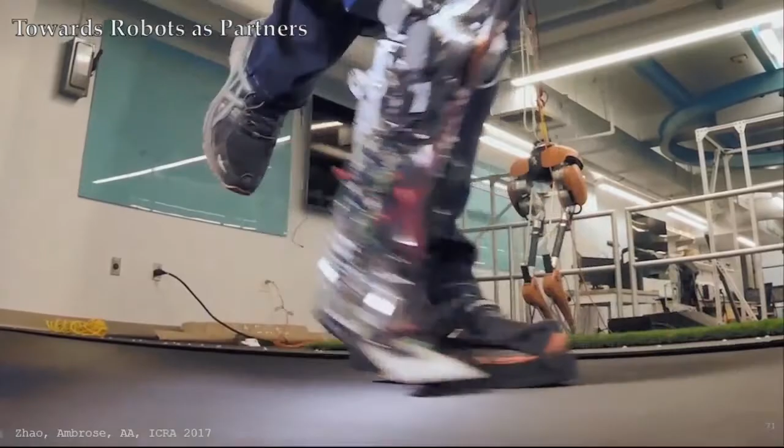But we've had some pretty nice successes so far, taking our QP-based control and applying it to prosthetics. We've even done it with actual amputees, implementing it on the system itself. This is our custom-built prosthetic in my lab, and we're running this QP-based control at 200 hertz on a BeagleBone while it's walking. We've even taken it outside and shown it can be fairly robust to different terrain types—flat ground, upslope, downslope. The point is, the way we generated the gaits in this case was like I showed you before. The controller realizing the CLF QP-based control is running on this device, and it works in a reasonably good context—pretty robust behaviors.

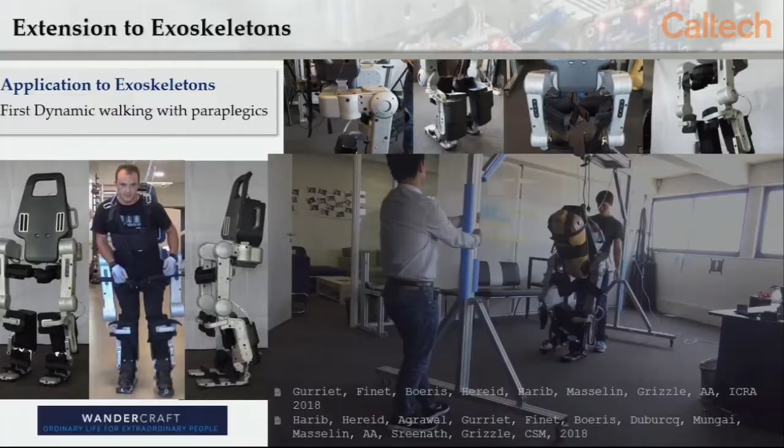The final bit is some exciting new stuff I did with Koushil as well, which was dynamic walking on exoskeletons. Berkeley has a long and rich history of exoskeletons, but up to date, no exoskeleton has ever walked with a paraplegic in it without crutches. The crutches are actually part of the control algorithm—every time they hit the ground, the exoskeleton walks. So the goal was: can we actually get crutch-free dynamic walking on exoskeletons?

Again, the process was exactly the same. In fact, the math on this exoskeleton is just like what we did on Durus. We worked with this French company, Wandercraft, to implement it on their device. We can make it walk dynamically with a dummy in it, meaning it walks on its own. That's actually harder than what you'll see later, getting it to walk with a dummy in it. It agrees with the simulation and everything.

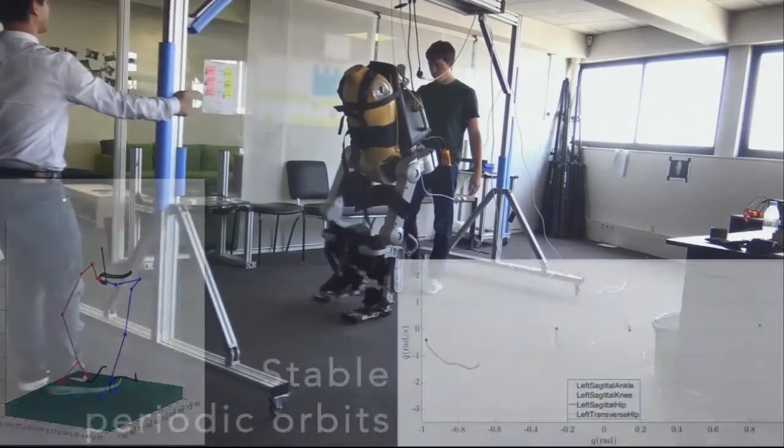And then the important part is, in France, they actually did clinical testing. This is an actual paraplegic walking in the device—he hadn't walked for about 10 years, he has a completely severed spinal cord. This was the first time he walked without the need for any assistance. So these things—and this is multiple—

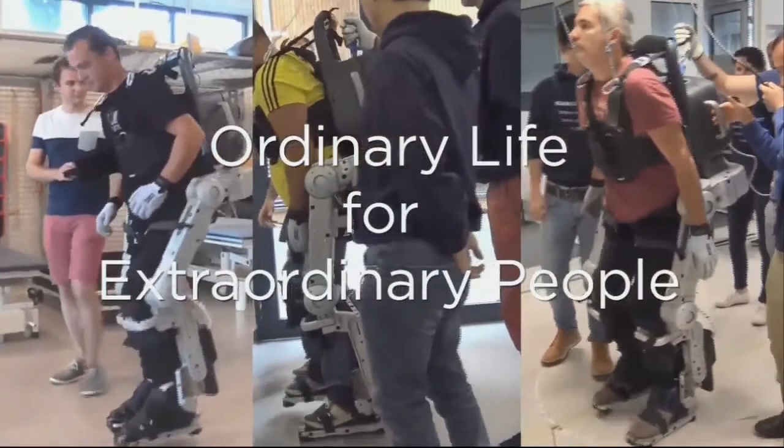It's actually been done—clinical trials on over a dozen patients now, somewhere near 20, where they've been able to walk with the device. So the point is, these things actually have real consequences on people's lives if we do our jobs and bring them out into the real world.

And excitingly enough, we now have one of these in my lab. These were taken about 2 weeks ago, so now we get to play with the exo in our lab itself at Caltech. It's a pretty sleek machine actually that they built. So that's the story, and I'm sticking to it.

I jumped through a lot of things here, but there's a takeaway I want to summarize. Don't read the slide, that's kind of irrelevant. First, as I opened with, learning plays a role, but we need learning with dynamics. We need to exploit the models we have and couple them to use learning for the parts we can't model.

I see people nodding their heads, so I'm glad there's agreement. That's step one. Step two is math matters. Nonlinear control matters. Theorems matter. What I always say is theorems are like that guiding candlelight in the cave. Without a theorem, you're just going to bump into the walls all day. You're going to tune parameters till you can't think anymore. A theorem tells you where to go.

Now that being said, I also showed you theorems don't fully illuminate the cave. They just tell you where to go. So you have to be intelligent about how you implement. But importantly, we have to try to bridge that divide. We need to actually illuminate the cave—make it brighter. And the way to do that is to bring together data-centered methods with dynamics and control.

Finally, a bunch of cool robot videos, which is the final lesson. The fact that robots make people happy is a happy consequence. Kids love robots, which is very cool. I always like showing these videos—it's really sweet. So before I end, we're just getting up already.

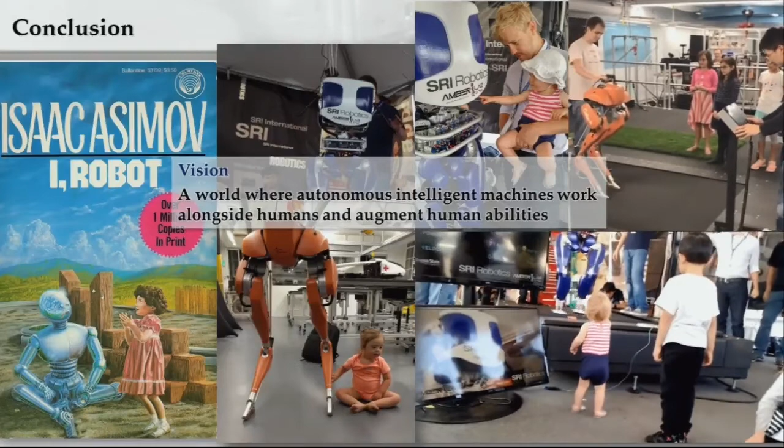Couple fun closing videos, because I think I have about 2 minutes. First, you might not believe this, but it turns out that turning or flipping a hamburger with a robot arm is exactly the same as walking. So all the algorithms we did to generate walking gaits, we actually applied them to this.

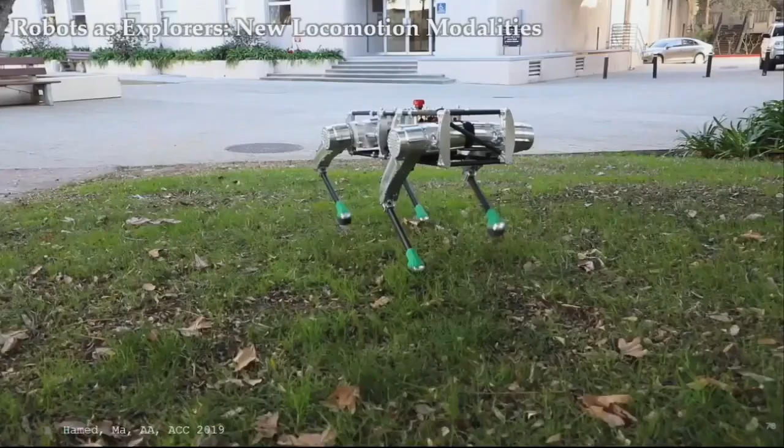I also rode in the exoskeleton, so I've ridden in my own algorithms, which was pretty cool too. And then finally, we're pushing for other robots just because I feel like the more robots, the better—you never have too many. So we're starting to play with quadrupedal robots. This is actually a ghost robotics quadruped built by Ghost Robotics, and we're going to put all of our fancy stuff on that. We're making robots do fun things.

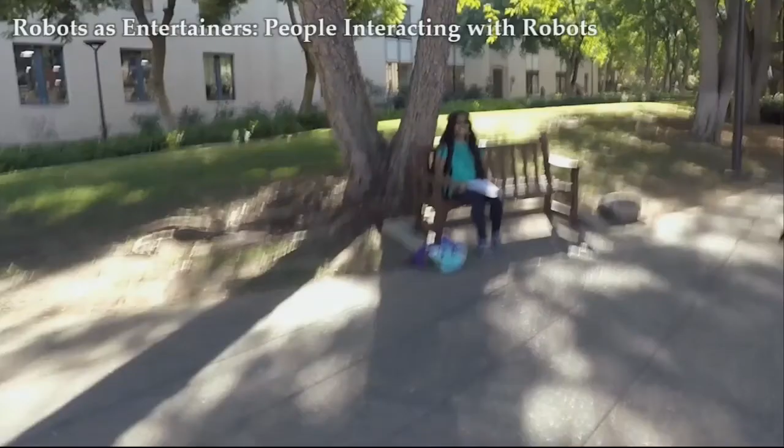I want to close by just showing robots interacting with people because I think it's such a cool thing, and that's where we ultimately want to be. So we surprised this student—we just walked the robot up to her. She wasn't expecting this, and what's funny is she started talking to the robot. It doesn't have a head, it doesn't have eyes, but she just started talking to it and enjoying the process.